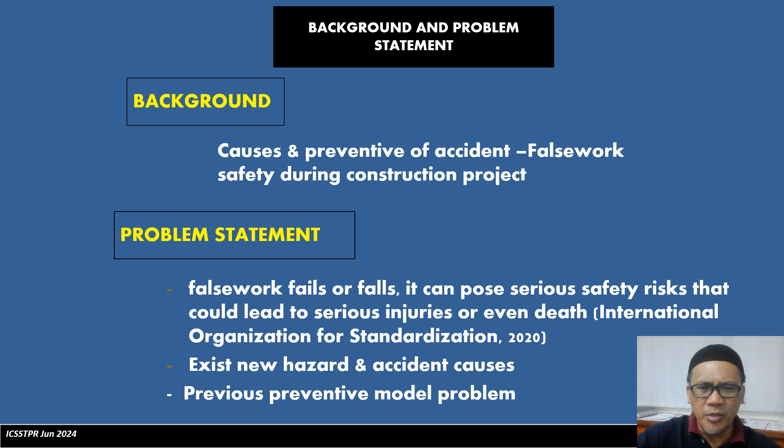Background of this research is focused on the causes and prevention of accidents, especially for falsework safety during construction projects. So the problem statement is if falsework fails, it can pose a serious safety risk that could lead to serious injuries or even death. This is from the International Organization for Standardization 2020. And then maybe there exist new hazards and accident causes in falsework activity. And then maybe there is a previous preventive model problem.

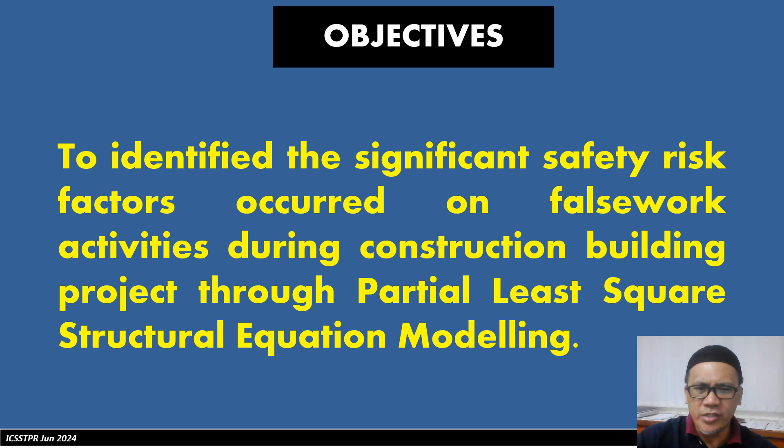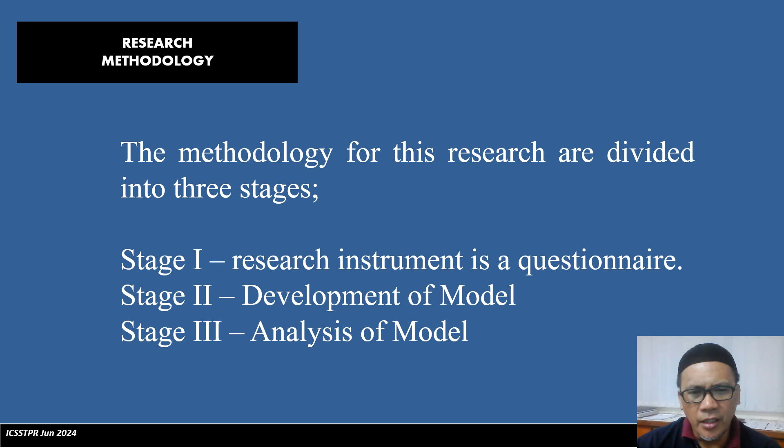So the objective of this research is to identify the significant safety risk factors occurring in falsework activities during construction building projects through partial least square structural equation modeling. For the research methodology, we divide it into three stages. Stage one is to develop the questionnaire. Stage two is to develop a model, and then stage three is to analyze the model. In this research, we use PLS-SEM.

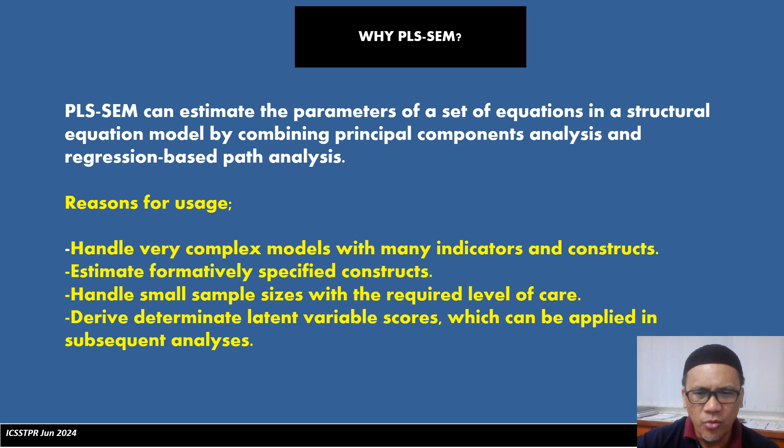Why we choose this method? Because PLS-SEM can estimate the parameters of a set of equations in a structural equation model by combining principal components analysis and regression-based path analysis. So the reasons for usage are: it can handle very complex models with many indicators and constructs, it can estimate formatively specified constructs, it can handle small sample sizes with the required level of care, and it can derive determinate latent variable scores which can be applied in subsequent analysis.

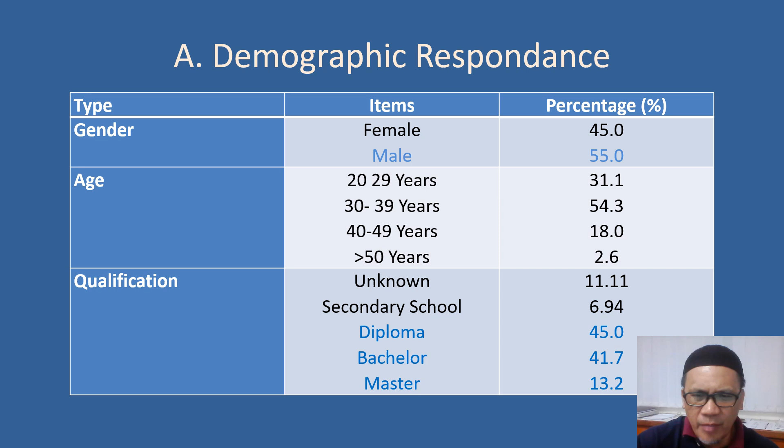So let's look at the results and discussion of this research. For this research, we take 119 respondents, and here is the respondent demographic. 45% is female and 55% is male. Age is mostly around 30 to 39 years old, and then 20 to 29 years old. For the qualification, most respondents have a diploma, 45%, and the rest have a bachelor's, 41.7%.

Position of respondents: 35.1% are site supervisors, 31.8% project managers, and the rest are project directors, 19.9%, and falsework specialists, 7%. For working experience, 44.4% have 3 to 5 years experience, and the others have 1 to 3 years experience, 39.7%. Then number of years in the construction field is 1 to 3 years for 50.7%, and 3 to 5 years is 25%.

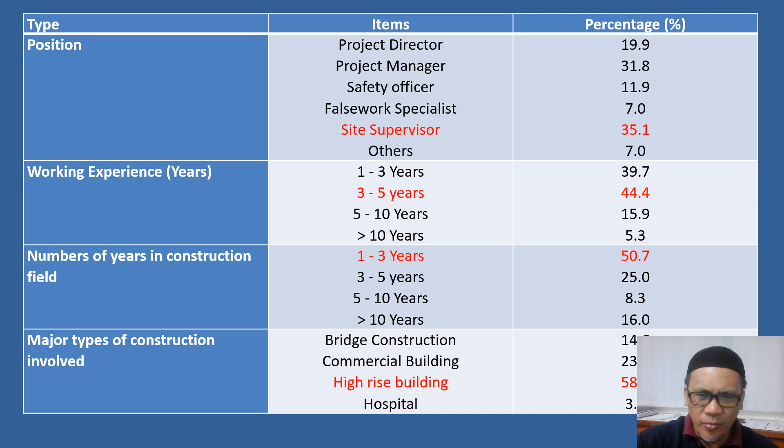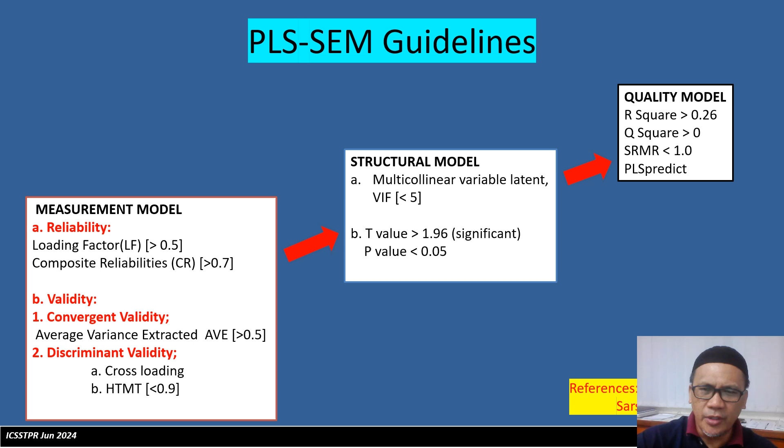And the major types of construction involved: the highest is high-rise building projects, 58%, and after that commercial building projects. So this is the guideline for PLS-SEM to develop the model. The first step is we need to run the measurement model, after that we run the structural model, and lastly we check the quality of the model.

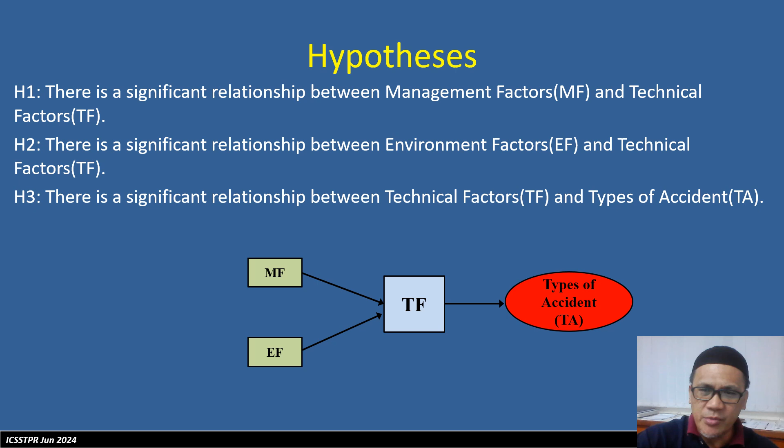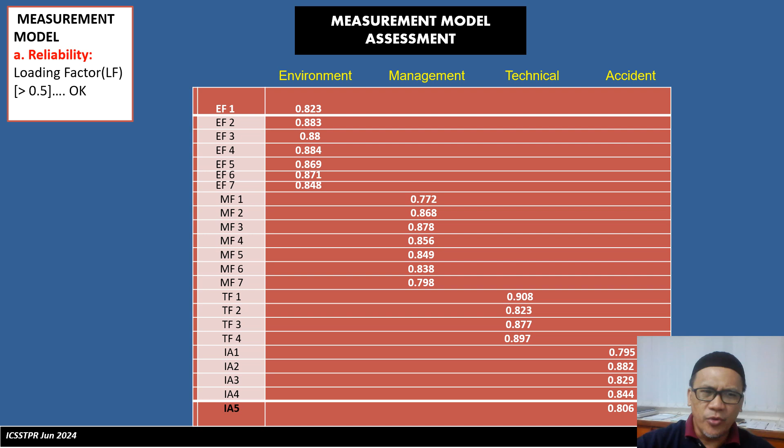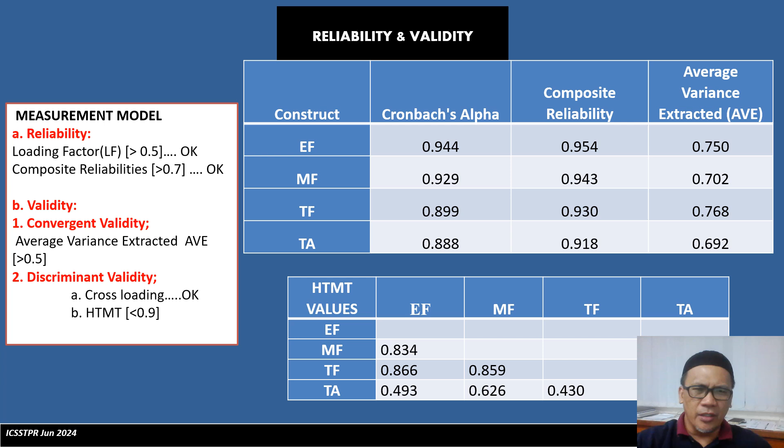For the hypotheses, we have three. One, there is a significant relationship between management factors and technical factors. Second, there is a significant relationship between environment factors and technical factors. And third, there is a significant relationship between technical factors and types of accident. So the result from the measurement model assessment: all loading factors are more than 0.5, so no issue for reliability. For reliability and validity in the measurement model, all indicators shown here follow the guideline for the PLS model. The cross-loading data show no discriminant validity issue.

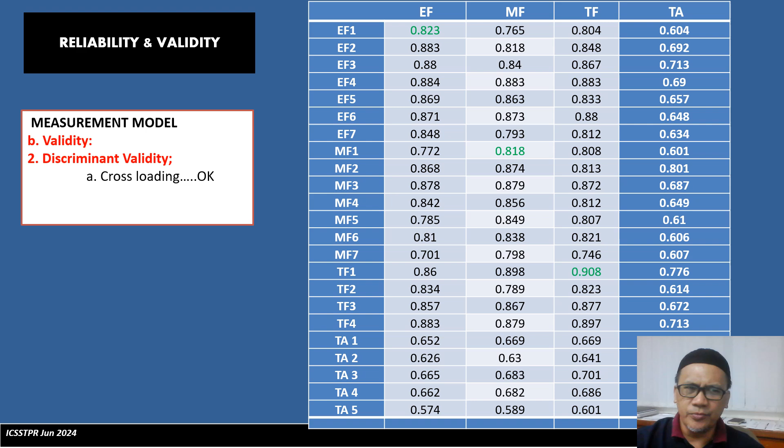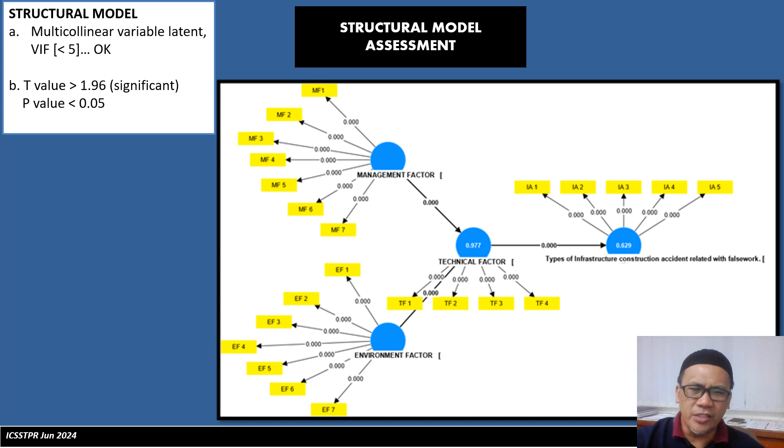Here is the structural model assessment, where the multicollinearity or VIF is less than 5, t-value is more than 1.96, and p-value is less than 0.05. Here the data show all the hypotheses are true. Hypothesis 1, hypothesis 2, and hypothesis 3 are significant.

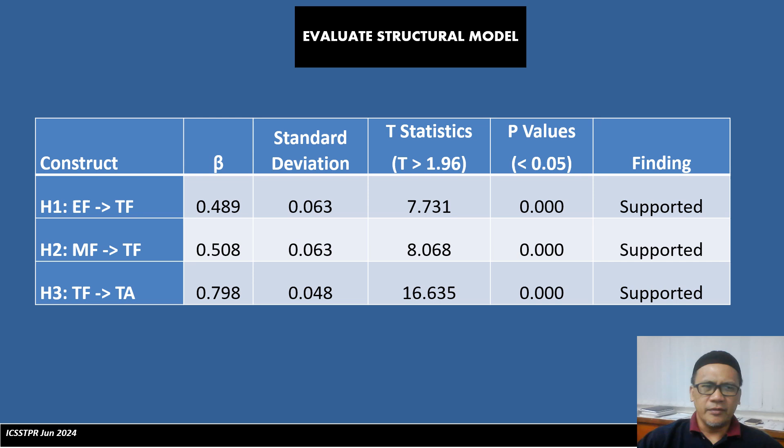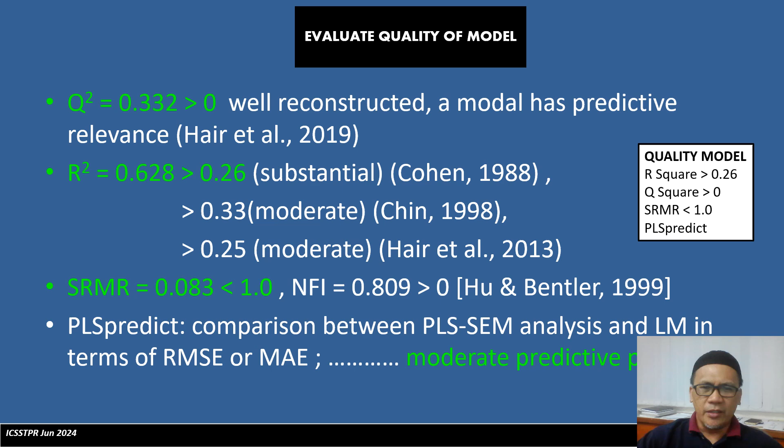And then PLS predict: we compare PLS-SEM and LM in terms of either RMSE or MAE. So we get that the model is moderately predictive. This is the data for PLS predict. We compare between PLS-SEM analysis and LM in terms of RMSE or MAE. We get the majority is lower, so we can classify the model as having moderate predictive power.

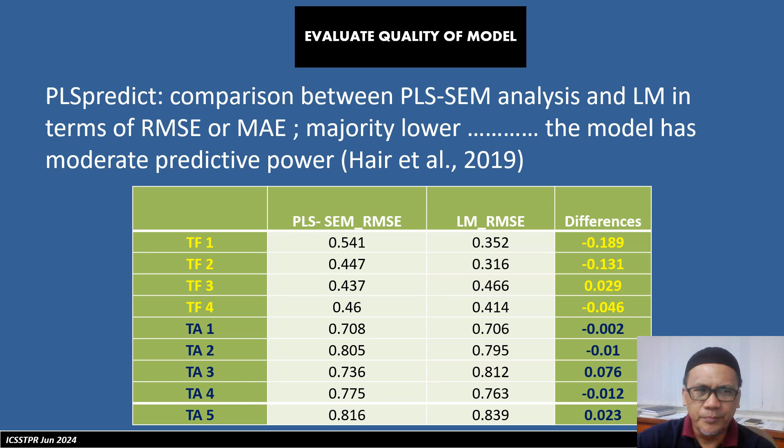Conclusion for this research: the study focused on investigating the significance between types of factors contributing to falsework failure and the types of falsework failure accidents at building construction. Results show that technical factors combined with either environmental factors or management factors can contribute to the types of falsework failure accidents during construction projects. This model will be able to help construction management in planning to avoid or reduce accidents during falsework activities.